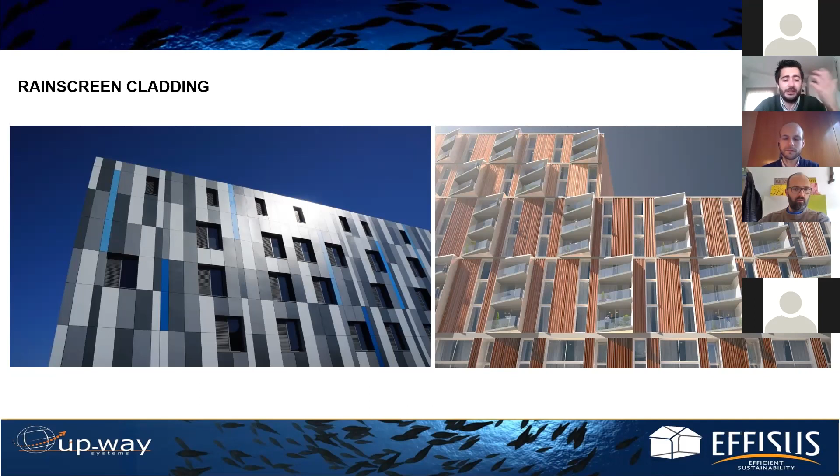Okay, so if I start, usually we look into these pictures and we see a rain screen cladding typology of the facade. It looks beautiful, it looks feasible, it fits the purpose. But in the end, somehow we sometimes see this kind of thing happen.

So it's not only in the same country, not only in the same year. Typologies of facades are totally different. So why do these things keep happening? We see that it happens more than what we'd expect.

For instance, I'll pick the most critical examples. Russia in 2017, 2 deaths. Grenfell Tower, unfortunately we know. Marco Polo Apartments in Honolulu, 3 deaths. In 2015, not far from now, 17 deaths. France, 1 dead. Shanghai, 53 deaths.

So why does this happen? We believe that in other disciplines, like structural design, concrete design, thermal design, these things are not happening. So why is it happening in terms of fire?

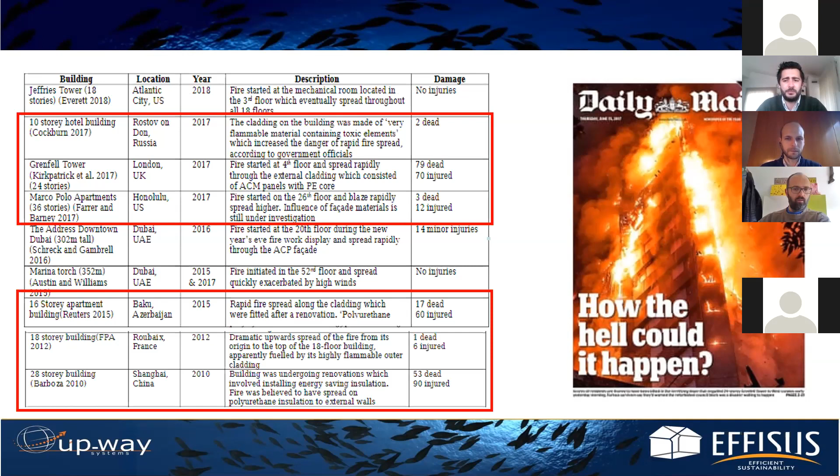One thing I'd like to say is that fire, nowadays in the facade, becomes not so much a technical question but a question of liability. So I think we, the facade players, need to work together to find a way to solve the issue.

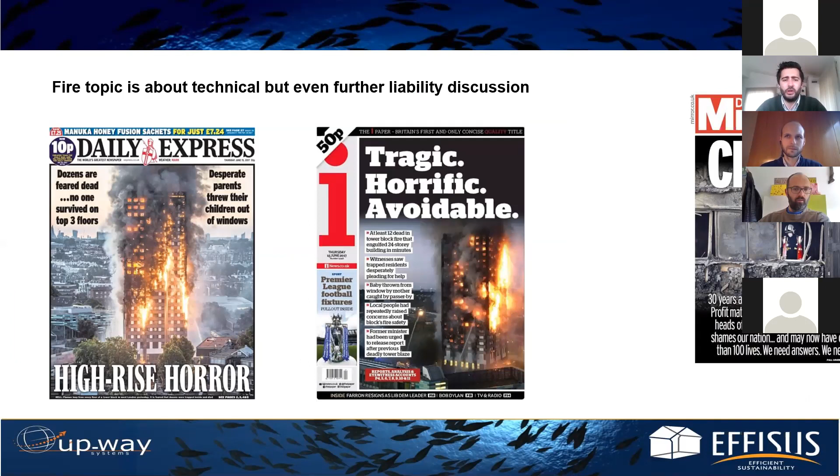This brings me to my next slide: why does fire remain an open discussion? In general there's a lot of discussion, a lot of confusion. Each country has its own rules. I'd like to bring some of the inputs that are part of fire design, but in general we don't see a common agreement, a common guideline, a common book, as we have in other engineering disciplines.

For instance, we generally know that in the facade, fire propagates from the exterior. Balconies are an issue, with a lot of combustible organic materials on them. Inside a flat, a kitchen fire can break the window, and then the fire will propagate. When fire reaches a rain screen cladding, we have the worst case scenario conditions: we have oxygen, we have airflow.

I'd like to keep your attention here: we have the worst scenario conditions, like a chimney inside our facade. Imagine high temperatures - the fire will propagate fast, so in a couple of minutes we'll have the full facade on fire. Here are some diagrams showing the implication of airflow on the height of temperature.

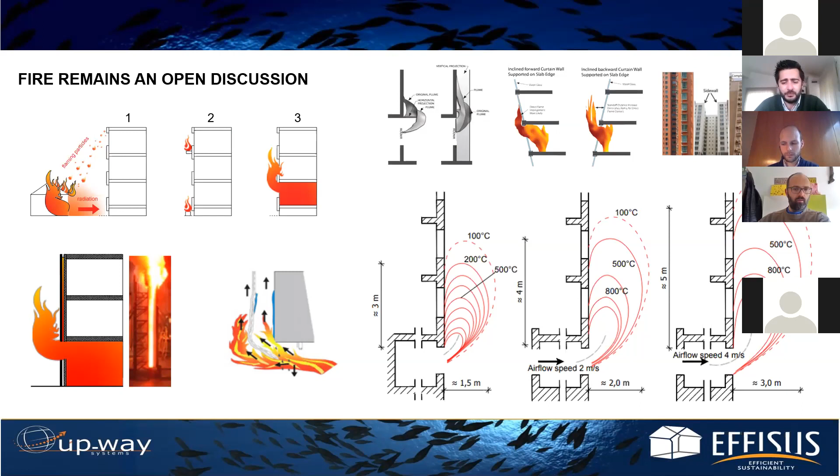But there are many, many more factors. So my point here is that we need to find a way to work together as a group with the institutions, otherwise it ends up being project by project, using common sense. This brings us to the next slide.

So what are the regulations doing? The regulations are trying, because this is quite difficult - it looks so difficult to predict the wind, to predict the fire load, to predict the geometry. So should we do a full-scale mock-up replicating my facade? Sometimes no, sometimes yes. So what regulations are trying to do is lay down rules requiring materials in facades to be non-combustible.

So in a way, if we reach that level, we will not have a fire on the facade. This is what's happening in the UK.

In the UK in general, there is a combustibility ban requiring all materials to be class A2 non-flammable. However, there are exclusions, membranes being one of them, but there are also discussions to improve standards for class A2. So we see really a push for class A2, and whatever the industry can deliver as non-combustible, the facade industry will.

We see in Dubai as well the same class A2, S1D0. We see Norway, Sweden, Italy. I believe that next year they will approve the class A2.

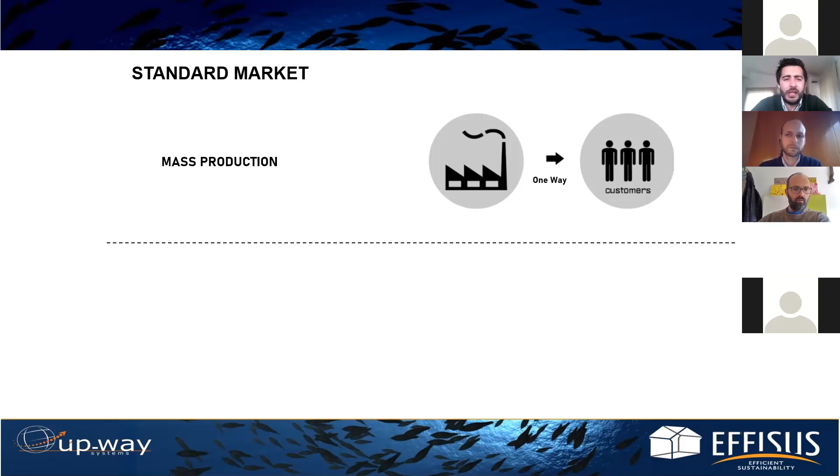So this reached a point of how Effisus could help with this. How can we contribute to this fire thematic? So here it is a really simple scheme.

When we have mass production, it's the industry delivering, and the client is sometimes fulfilling the requirements, sometimes not. What's coming now is that the industry doesn't have solutions for a lot of problems. And Effisus, since our methodology is to be really, really close to our clients to understand their needs, we are able to do another game.

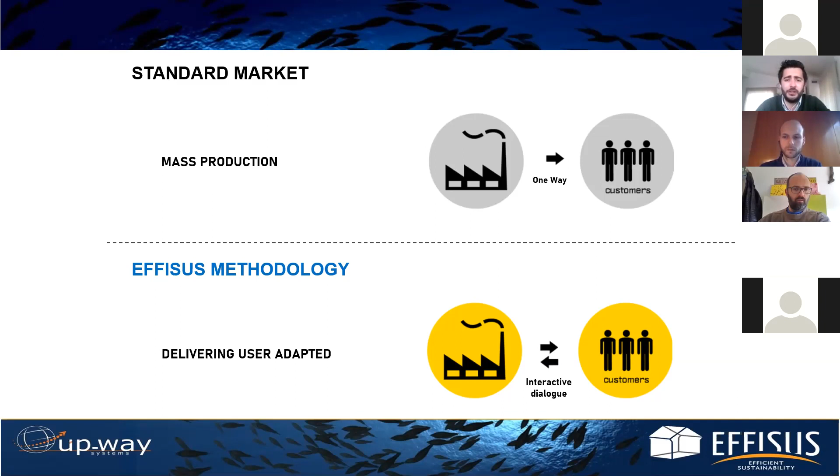So we have plenty of R&D projects, developing solutions that fit and help our clients in the end. And these fire-rated systems come exactly through this system, through this methodology.

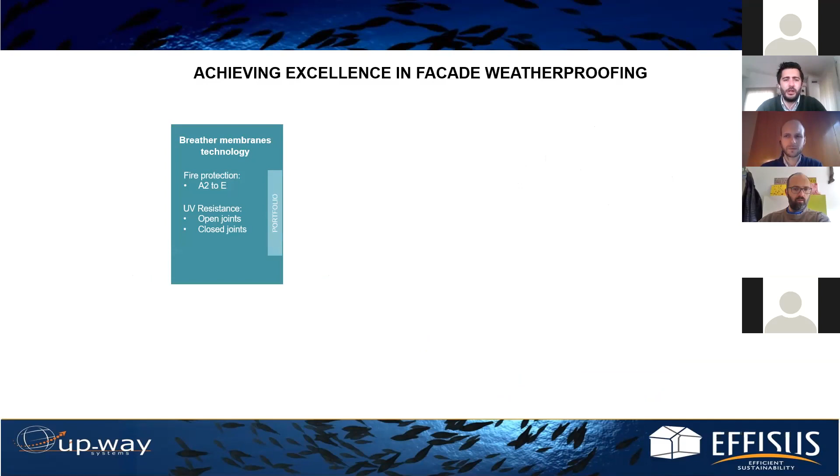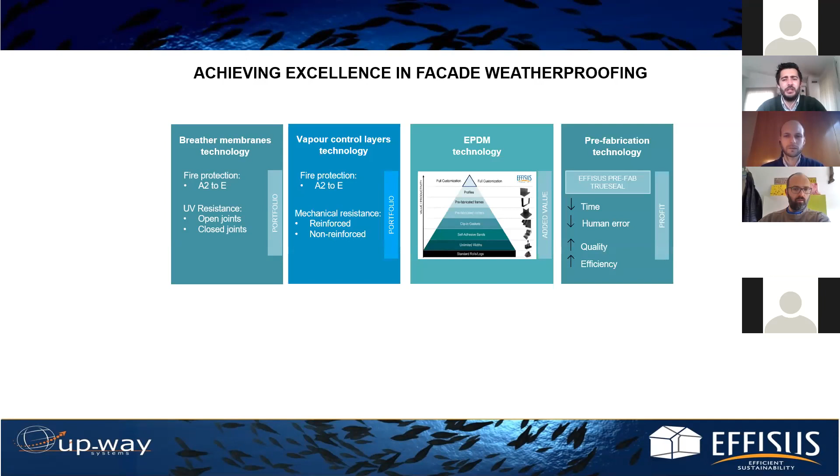So here, to be really, really focused on the membranes, on our systems: we have breather membrane technology, sheeting membrane, VCL membrane technology. We also have EPDM technology, a lot of prefabrication, custom-made, bespoke solutions, and then supported by a consulting department.

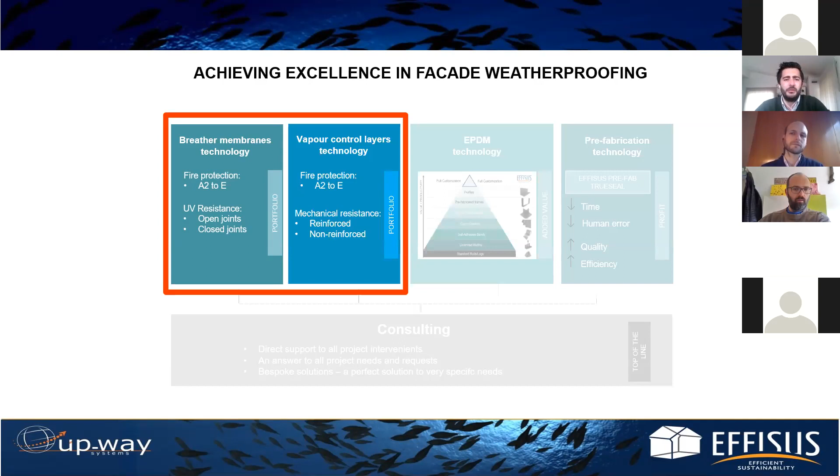And today we will speak only on the breather membrane technology and vapor control systems, fire rated.

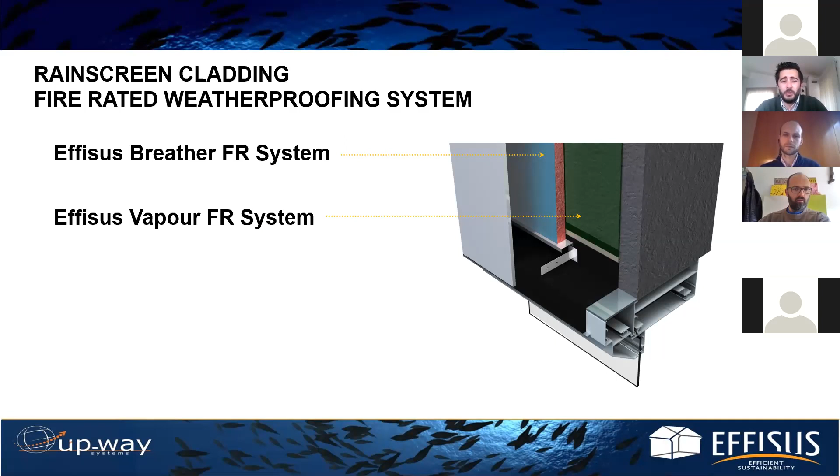So here, if we visualize - as you know, I will not take time to explain, I'll try to be really fast - what is the function of a breather membrane, traditional, and vapor VCL membrane. In general, I believe that you know. Anyhow, there are other sessions that focus on explaining the function of the breathers, the portfolio, the problems. So today I'll try to be really fast on that regard.

So now it's with the Effisus breathers. Effisus has more than one type of breather: open joints, closed joints with high tensile strength. But today we will speak in regards to fire class A2.

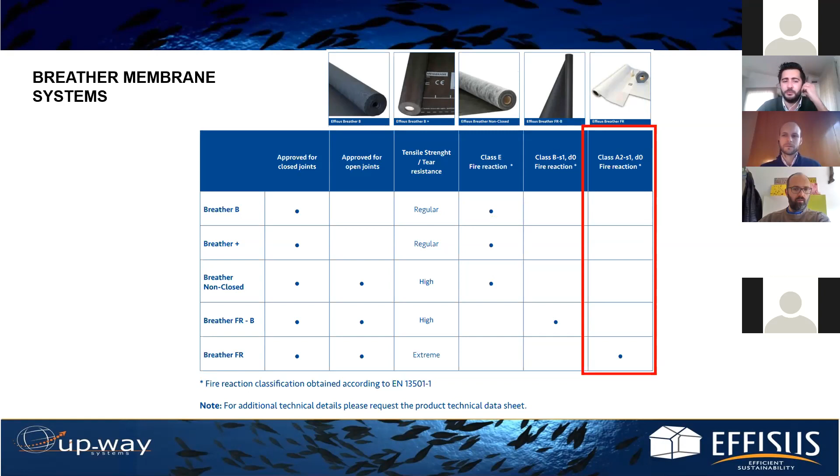And we reach this membrane. It is a membrane that we are currently using since 2011. We have had this technology, unfortunately, since 2011, and we are facing this push after the disaster in London. Anyhow, moving away from that, the membrane is vapor permeable, so it allows any vapor inside the insulation to go out during the summer seasons.

It is watertight, it is windtight, it has a fire reaction class A2, tested standalone and tested with accessories. When I say accessories, it's tape to fix to the substrate, tape to seal the overlap, and tape to seal nail and screw perforations.

Really important, it is CE marked, and it's also possible to customize self-adhesive bands in unlimited widths. And in the end, really extreme UV resistance based on the fiberglass base material.

So with this membrane, we also tested to ASTM E84. It's another test where the results are both really good.

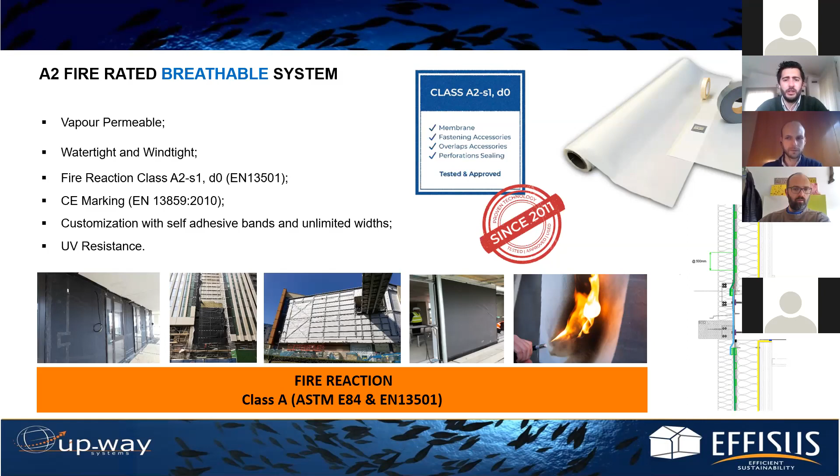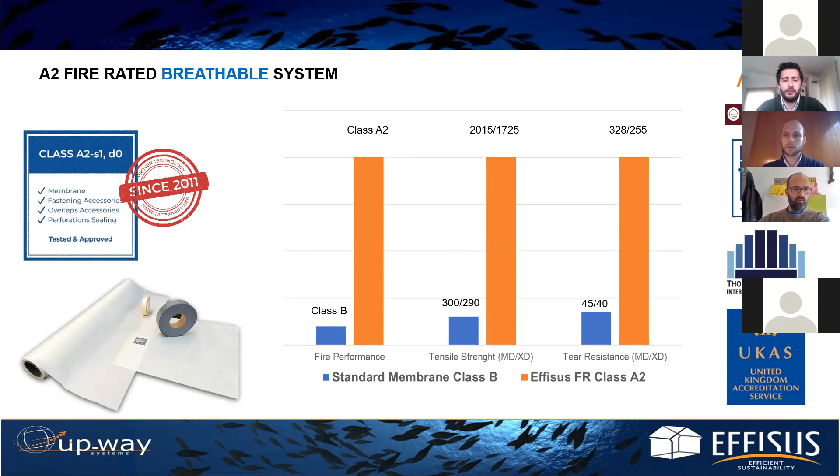You are adding fire performance, but you are also adding mechanical resistance. You could see here the difference: we are talking about 300 tensile and tear, and we are going up to 2000. This is based off the fiberglass, it's really hard. So you are adding fire and mechanical resistance to a really commodity product.

Enrique, I'd like to collect here the feedback from the field. We are already applying this membrane with success, so it's really nice that we have your feedback.

Thank you, Miguel. I hope you all are hearing me well.

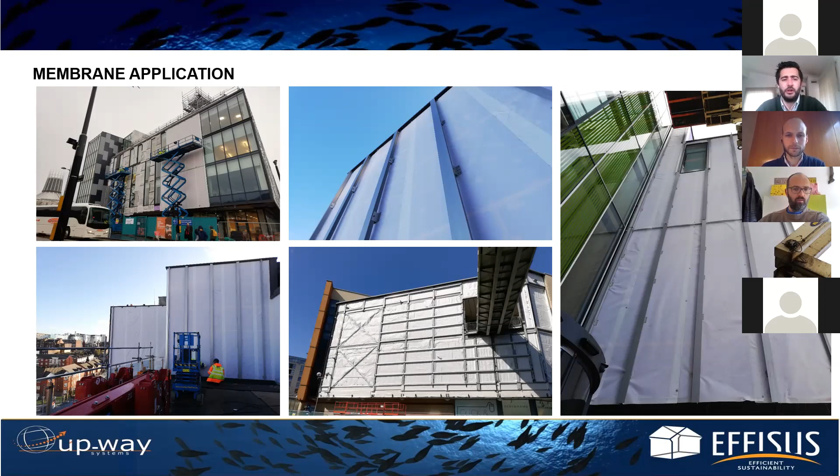Okay, so now we close the Breather FR system, class A2S1D0, and move on to the Effisus Vapor FR system. Here we have more or less the same technology. As we said at the beginning, we stay close to our clients and know what they need, fulfilling their needs. We developed this technology in 2011, and came up with the Effisus Vapor FR.

The base material is the same, but this is a VCL. So the client gets the full system: internally a VCL and externally a breathable membrane, fully tested with accessories, obtaining the same classification A2S1D0. In the end, it's a vapor barrier, watertight, and airtight as well, which is really important. Fire resistance, as I already mentioned, CE marking, customization, bespoke solutions—always possible with us—and obviously UV resistance.

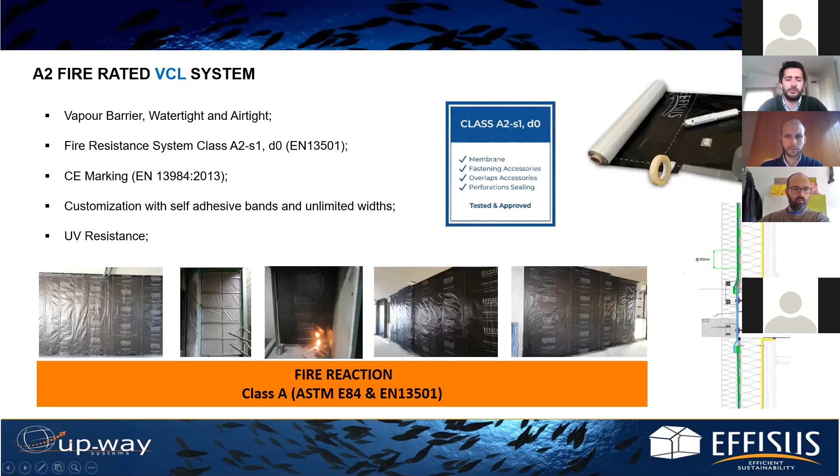Again, we've done the ASTM E84 test and obtained class A, same as the Breather FR, for the same reason. We have all the technical specs with additional fire performance and mechanical performance, as well as vapor resistance. This membrane is more tight, more vapor tight than a standard membrane.

This allows us to have a real block, so we know we don't have any interactions or convection from interior to exterior or exterior to interior. And with the right breather membrane, we always ensure the insulation stays really dry.

And here, Enrique, if you could do the same, what is your feedback from the field? Yeah, sure, Miguel. And then I think we'll have already some questions from the chat. Okay, but I'll first comment on these pictures.

Just to conclude this topic, yes, here for instance we're seeing some of the pictures I took from the site regarding this VCL installation. As you see, it's fully covering the interior of the facade, so it's an SFS system. And again, the installation here would be very much the same as in other current VCLs.

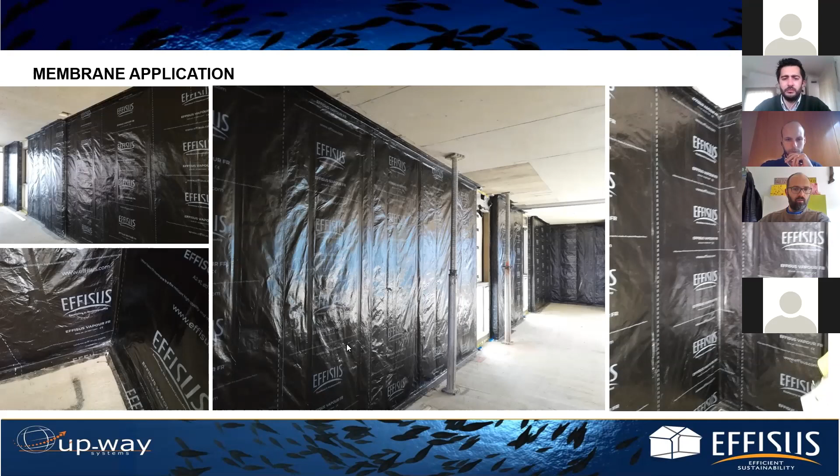Yeah, okay, we'll return back to the chat. Maybe we can just keep going, Miguel. Okay. Sorry, Enrique. Yes, go ahead, Enrique.

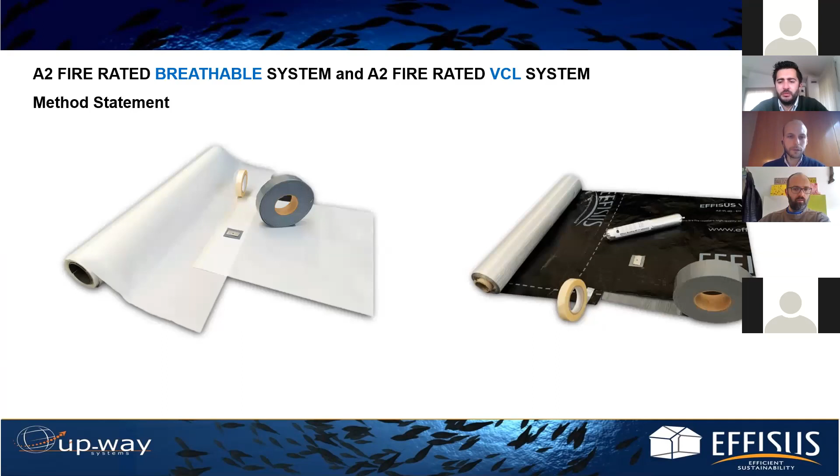Because we were mentioning the easy installation procedure that we have with these membranes, we would like to briefly share with you the main steps when installing both on a rainscreen cladding system and on an SFS cladding system, going through some details. Miguel, if you could just change the slide.

In this first slide we have a demonstration, a drawing, where you can easily understand that we just apply some lines of self-adhesive tape in order to temporarily fix the membrane to the substrate. I say temporary fix because after that comes the cladding bracket, or if we're talking about the interior, the plasterboard fixing. Every time we have a self-adhesive tape, we apply it approximately half a meter apart between each line, and then we come with the membrane on top, as already explained. This would be the same in both systems, and then we have some overlapping details.

Very simple as well: in some orientations we have 150 mil, and on the horizontal laps we have 100 mil, just a matter of overlapping the membrane rolls and then sealing with self-adhesive tape. We try, in any solution, to keep the changes to a minimum. But more than that, we'll be able to look into your project to understand what substrate is involved and what accessories from our portfolio would help and perform better in that specific case. It's just to let you know that the instructions are really, really easy and clear.

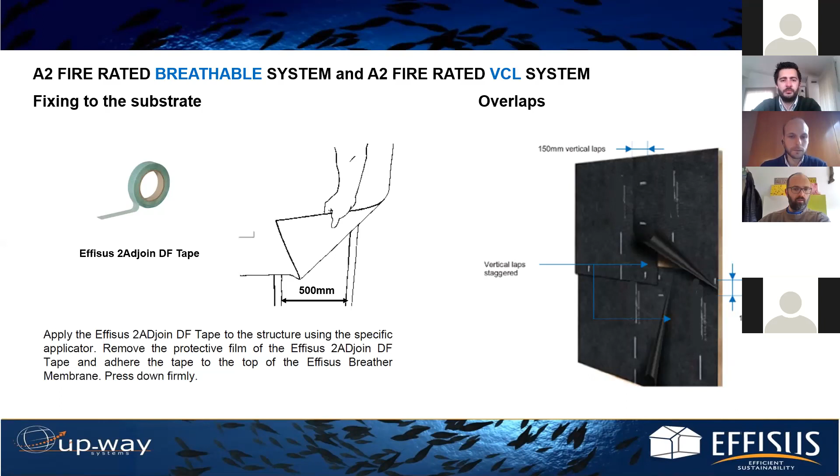When we're designing and looking at the breathable membrane, it is all these things. Sometimes it seems not to be very relevant in terms of the designing, because it would be solved on site. And in fact it is solved on site, but we can previously try to understand all these points and all these things would be covered.

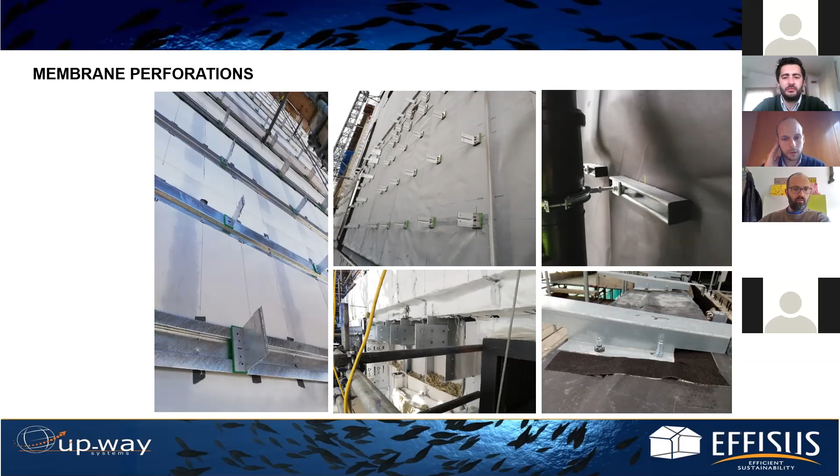Okay Enrique, thank you so much. So we end up today with the session that we have a breather FR A2 breathable system, an A2 fire rated system, tested with accessories replicating the facade EN 13501.

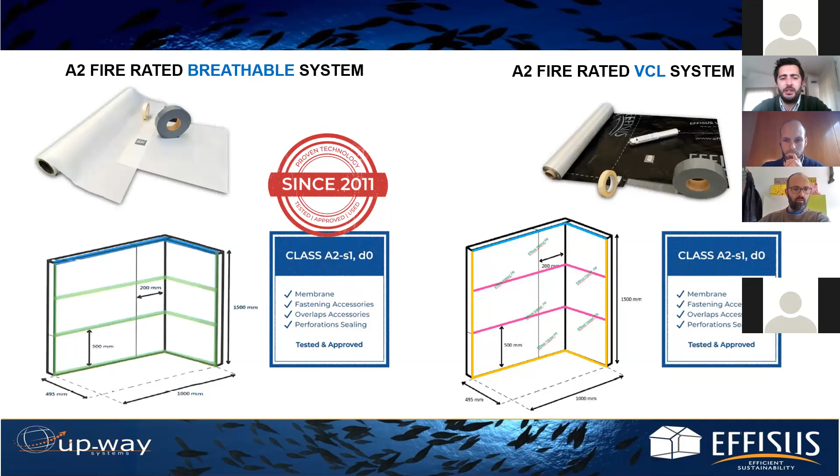So here I'd like to be really fast. I believe more than you know how this test is performed, but basically when we have a class A2 membrane, each class on this test has to fulfill each standard and criteria. For instance, on class A2, we need to do the ISO 1716 and also 13823 and fulfill all of this criteria. And we have this 13823, a corner that we expose totally to the fire, the membranes during 10 minutes, more than 600 degrees. Here it is the calorimeter test.

So each layer of the membrane and each accessory is tested fulfilling all of this, and then it goes internally to a machine that measures the calorific power of each layer standalone and summarizing all of them, and you cannot reach these criteria, these levels. So we fulfill all of them. On top of that, we also achieve the best class in terms of smoke and in terms of droplets. So basically, this is a summary of the classification and the results.

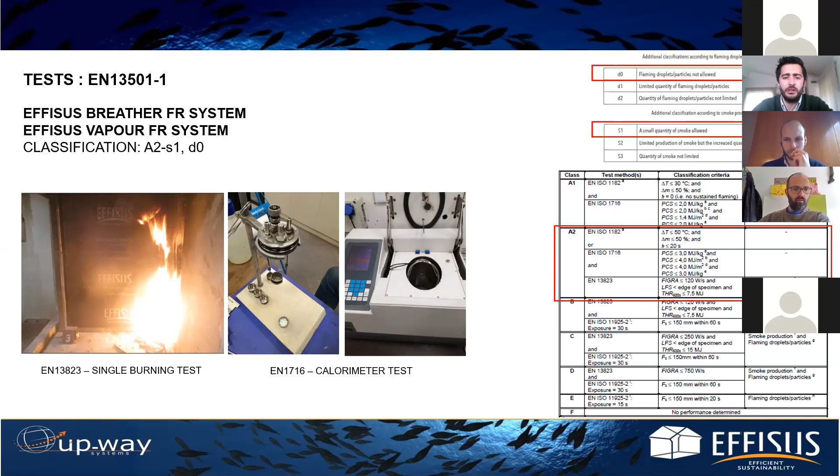So the function of doing this test is to try to minimize, if we have a fire in a kitchen or a fire in a balcony for instance, the fire will not reach to this level. So it will not break the glass and propagate level and level and level.

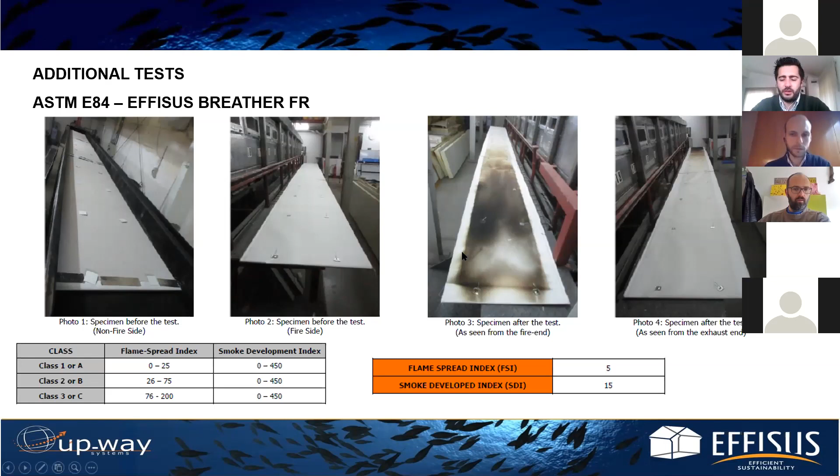So yes, correct Enrique, and you know this testing, Enrique, you'll be the guy. This is not new - we are using these membranes, our clients already have good practice, and we're using them throughout Europe, the UK, and outside Europe. On my side, being more linked to consultants and architects, I really share with you guys that we see a tendency toward Class A2 - it's really specified in most of these projects.

I don't know, Enrique. So if you could share your feedback from the field on what is going on with this project ongoing, it would be really, really nice.

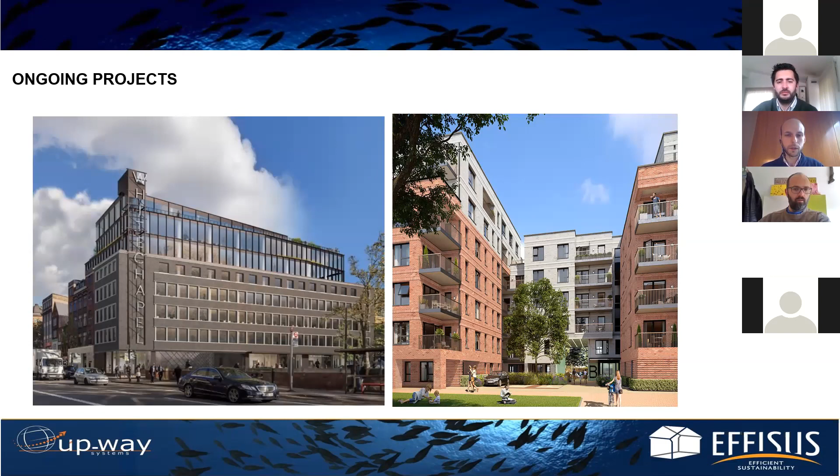And then we have some additional projects ongoing in the UK. This is Whitechapel at the left, and Alton Park at the right. And from my side, we have a lot in the pipeline already specified in the tender phase.

Yeah. And here, outside the UK, more in the Middle East and Arabia, we have iconic projects using the same technology, more on the vapor FR membrane — really a broad portfolio.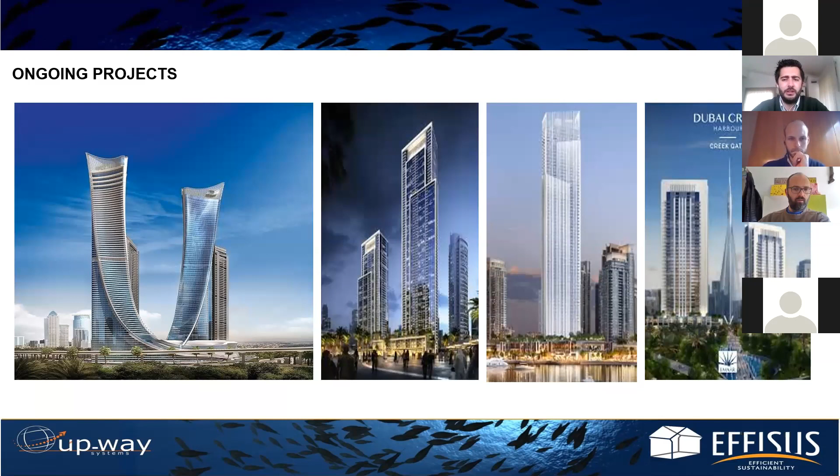So I don't know if in the chat room, Enrique, we have any other questions.

I think Alan was asking if the cladding on the building at the lower right was the one used in the BS 8414 test — the mock-up test. I don't know, I have no idea. So do you know which test Alan is referring to?

As you can see, the claddings are much the same. Okay, so I think you can move forward now, Miguel.

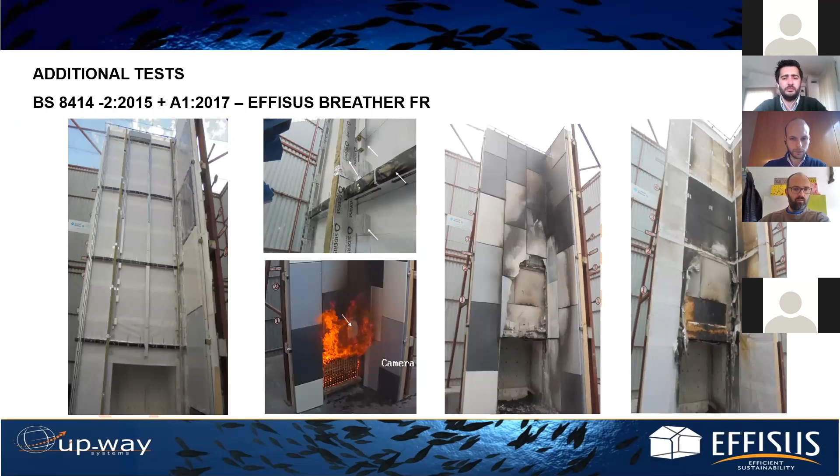So we were discussing the portfolio, and then we also have projects in France that aren't shown here. So, summarizing, the product is being used massively in Europe, in the UK.

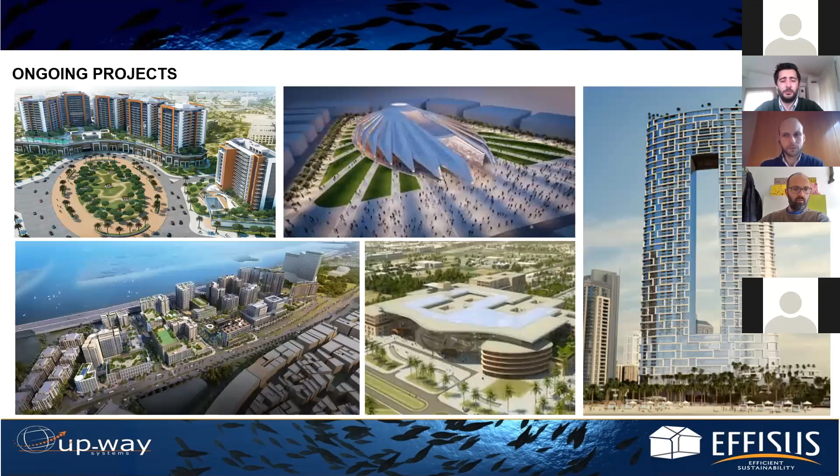I could see this because I've been in the field for about a year. The product is specified in a lot of projects in the UK, and we really see, as I told you, a movement toward Class A2.

By the way, I have information that the government and everyone is pushing to change the regulations to be like a benchmark, or to be full Class A2. So as I said from the beginning, this is not just technical, it's also about liability.

So in our job, in our designs, we should at least specify what is best, in order to avoid problems and losses in our projects, in our construction. So I'd like to end on that.

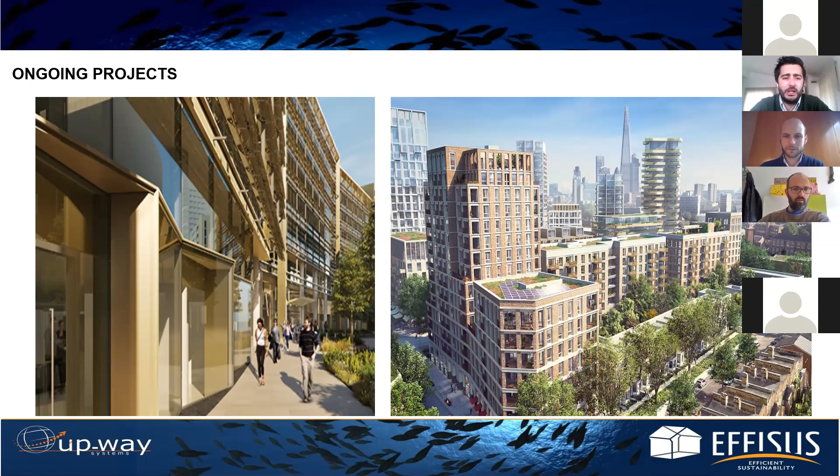And here I'll take the opportunity to mention that we write technical articles covering topics like detailing or designing penetrations on facades. Next week another one will be launched about service — how important service is, not just products — and I invite you to stay connected on these technical articles. As I said from the beginning, future sessions will be closer to you.